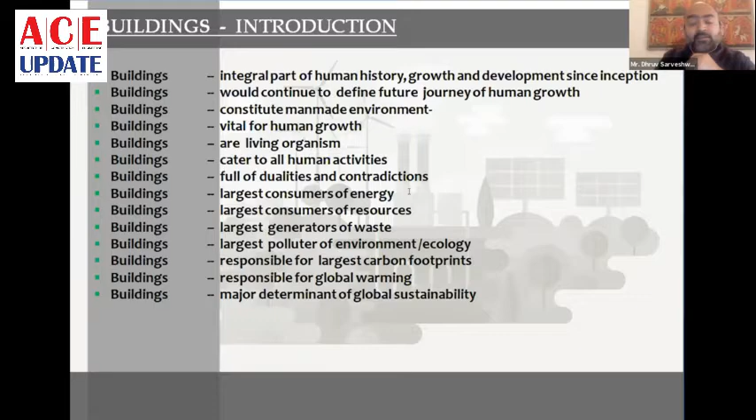But on the downside, buildings in today's time and age are one of the largest consumers of energy. They're the largest consumers of resources and generate more waste than any other activity on earth. A brief introduction to how much resources are consumed by a building: 16% of the world's fresh water withdrawal is taken up by buildings, 25% of the wood harvested, and 70% of global warming is actually attributed to buildings and transportation — meaning the carbon footprint associated with materials that reach your site.

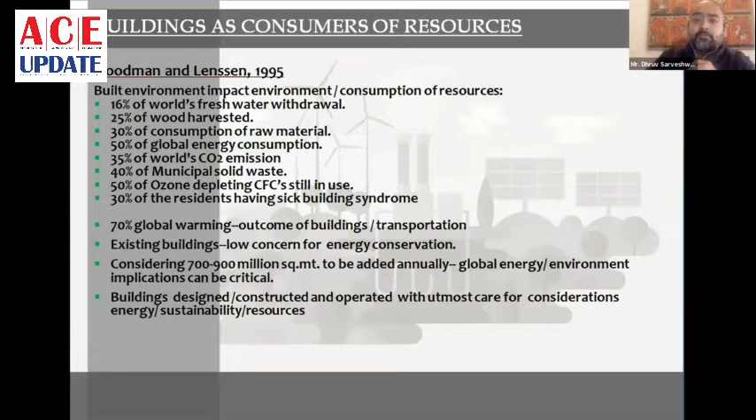As an energy consumption pattern, the developed world has about 22% of the population and about 70% of the energy used. The developing world has 78% of the population and about 30% of the energy used. Now, as the Indian subcontinent, or rather India as a country, we are ushering into a stage where we probably go into the developed nations very, very soon. So the time is critical, and it is now that we understand what we need to do to conserve the energy we are going to consume for future generations to come.

So I'm sharing a few statistics here. Moving on.

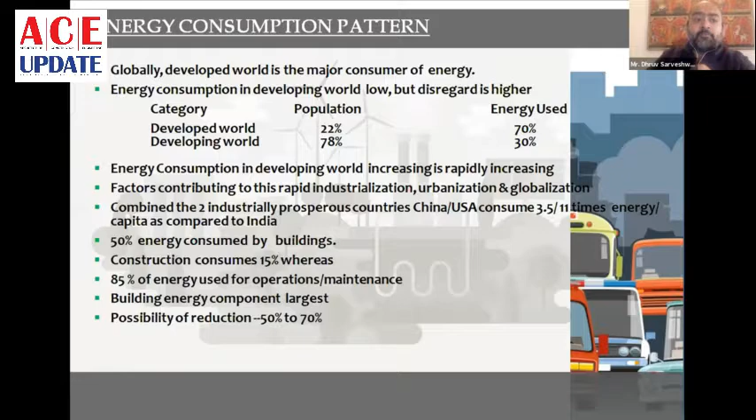Why are we looking towards the benefits of green buildings today? Green buildings have not just become a status symbol, they've become a way of life. If we don't adopt or adapt to this, we would sooner or later falter, and the resources we are meaning to conserve for our future generations will no more be at our disposal. So in designing a green building, the aim would be to conserve energy and water consumption, reduce carbon emissions, reduce waste produced, and consume lesser water.

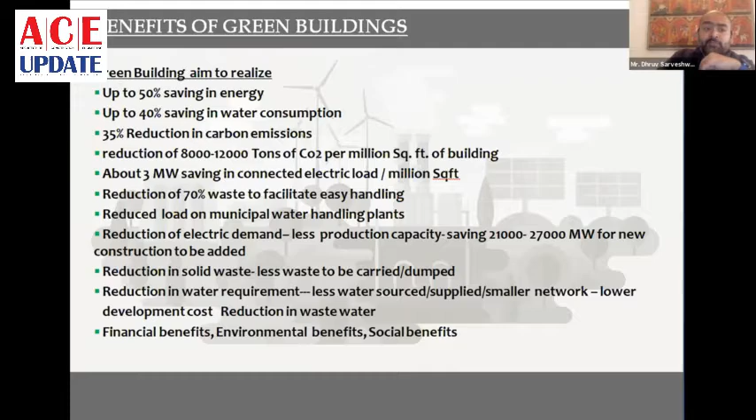I think it is time that we rediscover our time-tested ethos — designing with these five elements in mind: Prithvi, earth; Jal, water; Agni, fire; Vayu, air; and Akash, the sky. So today, in talking about design principles, I'm going to majorly talk about designing with earth and fire, which is site dependent planning, and energy efficiency.

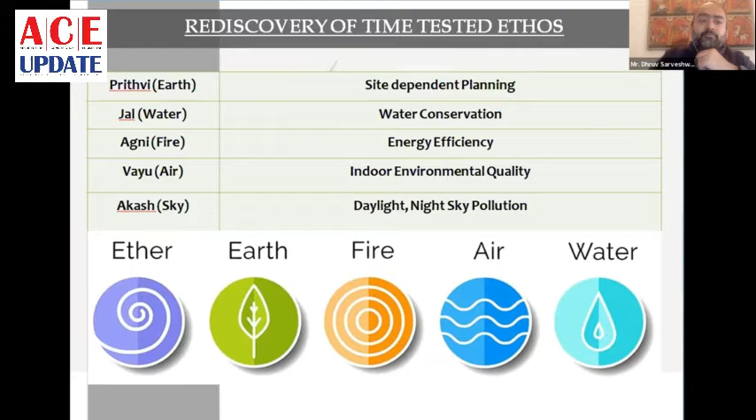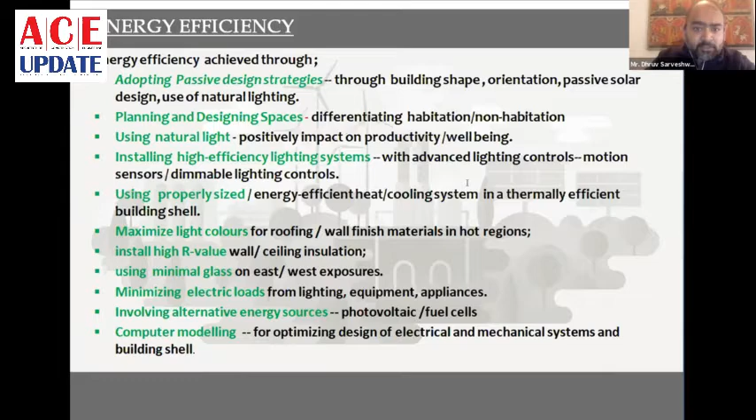Energy efficiency can be achieved through various means, a few of them being adopting passive design strategies through building shape, orientation, passive solar design and use of natural light, planning and designing spaces using natural light, installing high efficiency lighting systems, properly sized rooms, thermal efficient building shells, maximizing light colors that reflect more light and reduce dependency on artificial lighting, installing high R-value ceiling insulation, using minimal glass on east and west exposures, and so on.

The aims we are looking towards when we design energy efficient buildings are conserving natural resources, using less water, optimizing energy efficiency, generating less waste, and providing healthier spaces. Most of us are familiar with the first four things, but the end desired outcome is the fifth: to provide healthier spaces for its occupants.

There is a great big problem that we are facing with the buildings that we are designing, that is sick building syndrome. Probably all of us have been through COVID. We've been confined in our homes for quite a while, and we've realized that there is more to a building than meets the eye, more than just living in these four walls.

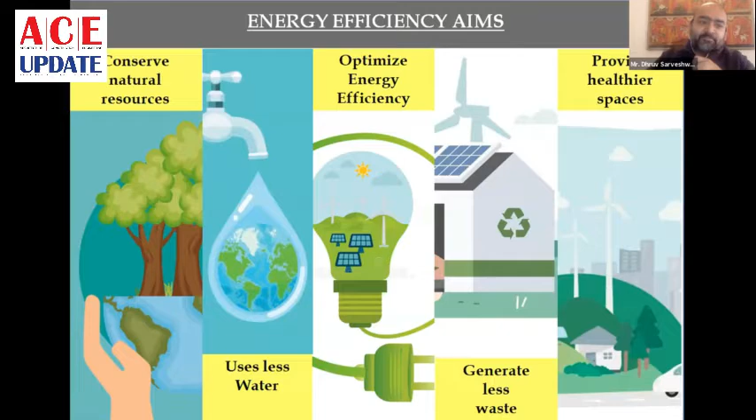Going on, there are cost-effective strategies for energy efficiency. Here I'm sharing with you the energy efficiency strategies that need to be used and the cost implications that there are.

A lot of times people ask us questions, and the client also asks questions like, if I do a green building, what is going to happen? How much money am I going to pump into the entire project? Oh no, no, no, I'm not going to do a green building, I don't have the money for it.

So the intervention is not financial through and through, it is with design interventions. The most common one is a passive measure where you do climate responsive architectural design, an energy efficient envelope, daylight harvesting, and integration of natural resources. The second, a little costlier to implement, is using efficient equipment and efficient building operations like BMS systems. The third is offsetting any demand of the building by using natural renewable energies.

So though this is going to be a cost intensive project, you must remember that whatever cost implication is there, it is going to be offset by the building when it gives you a return in terms of energy savings.

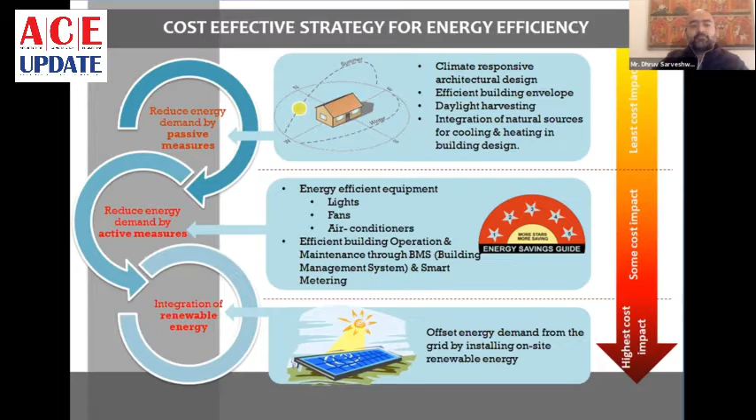So why do we need integrated design principles? Because of considerable energy implications, the need for buildings to be made sustainable, large reduction of energy consumption possible, and sustainable development goals. The end goal is obviously attaining net zero buildings.

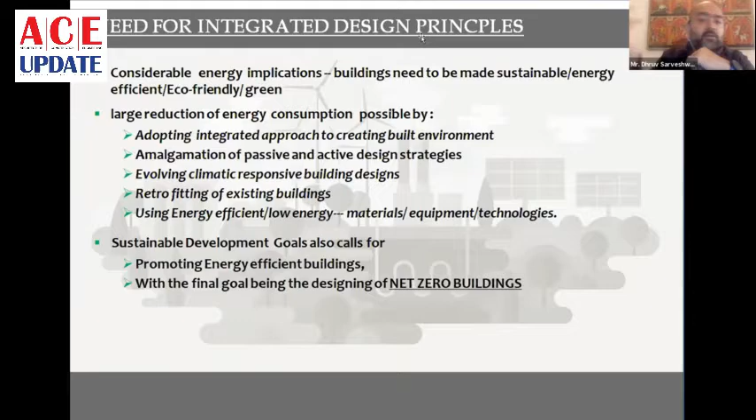Energy efficient buildings with design strategies involve designing the built environment. The aspects of a built environment are basically siting, that is site planning, design, construction, operations, maintenance, renovation, and deconstruction. Consumption, environmental effects, and ultimate effects are going to be touched on by other people in the presentations today.

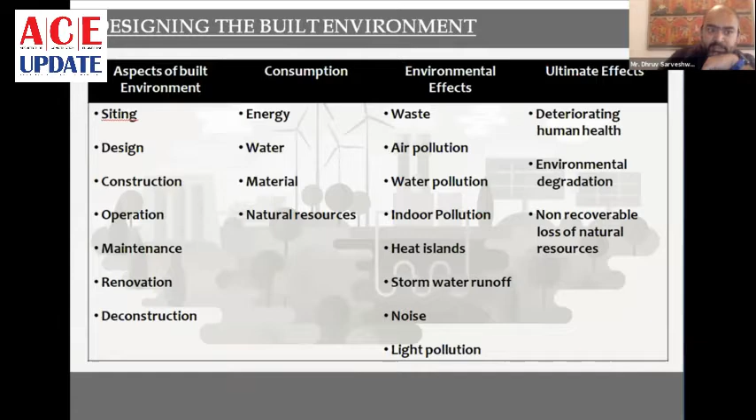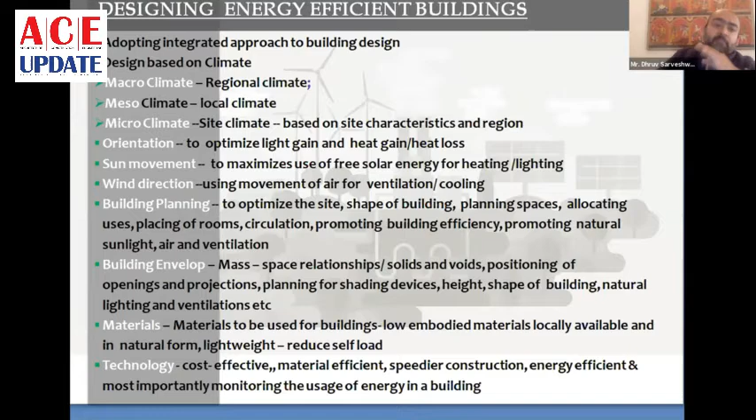Designing energy efficient buildings comes with a tag of designing as per the climate, that is micro, meso, and macro, the orientation, the sun movement, wind direction, building planning, and the building envelope. Materials and technology also play a very important role in maintaining these things and providing a lesser running cost.

Looking at the climate and site orientation, we've got five climate zones in India: hot and dry, warm and humid, moderate or temperate, cold, and composite. All green buildings cannot have the same requirements - this is not a one size fits all thing, it's a tailor-made thing. You have to analyze what place you're working in, what sort of site you have. If you're thinking you will learn a thumb rule for green buildings, that is probably not going to happen.

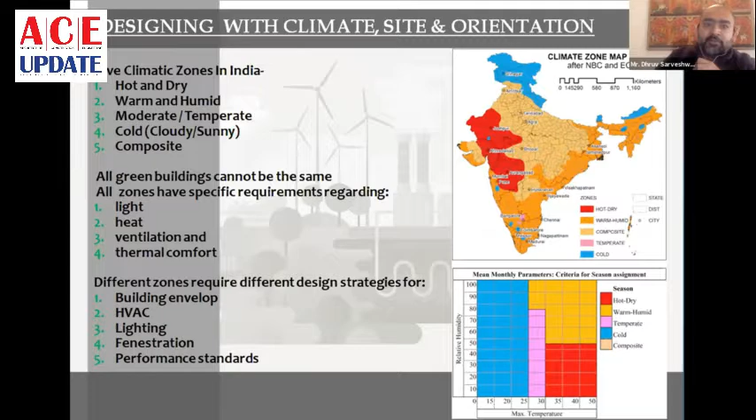Moving on with the hot and dry climate, these are the thermal requirements and physical manifestations. Reducing heat gain is the major drive for a hot and dry climate, and promoting heat loss is also a major drive for designing in a hot and dry climate with passive systems.

As far as passive systems are concerned, when we promote heat loss, there's a lot of introduction of courtyards, wind towers, arrangement of openings, increase in humidity levels, like introduction of trees, water ponds, and evaporative cooling. I'm going to further share a diagram with you of what happens when you design a building in a hot and dry climate.

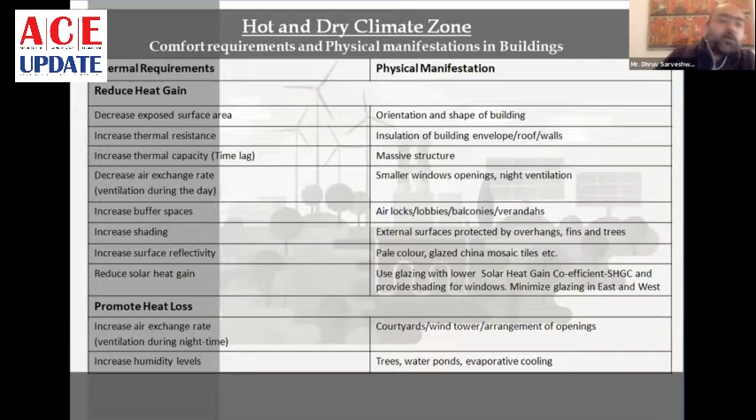In the left diagram, there is a central water body introduced, and a larger opening towards the courtyard which is shaded by the sun, generating cool air, with a smaller opening for exiting the cool air. On the right, there is another building with a lot of cross ventilation, where deciduous trees give shade and cool down the air entering the building. There is always a gap maintained in the images below, creating a pocket of air to retain the coolth of the air generated.

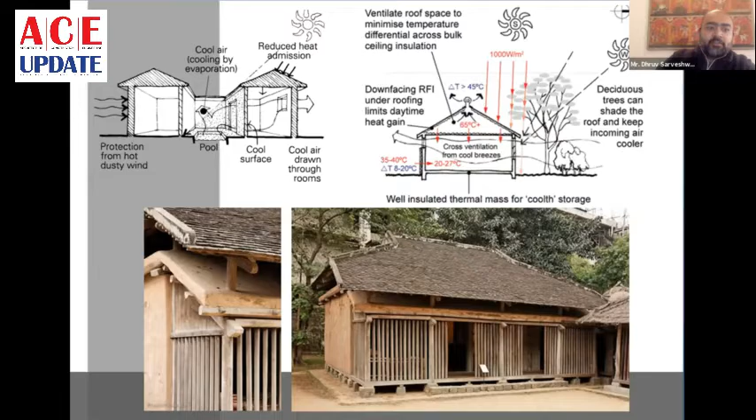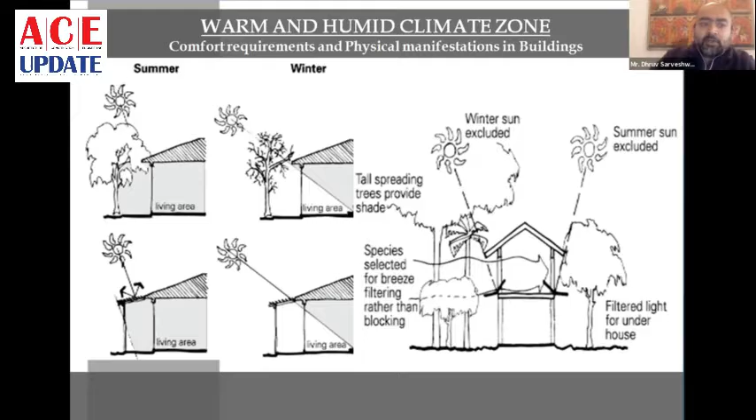Warm and humid climate zone. In summers, you cut out the heat by using trees. In winters, you have trees without leaves which let the air come in. When you have patios or extended portions, you shade them with a lattice. For winter sun, the lattice is designed so that it lets the sun come in. You raise the floor of the building so there is good ventilation underneath, and generally no heat or humidity gets trapped there. An example of a very fine building is the Green Corner House at Costa Rica, by GOSA, a design firm.

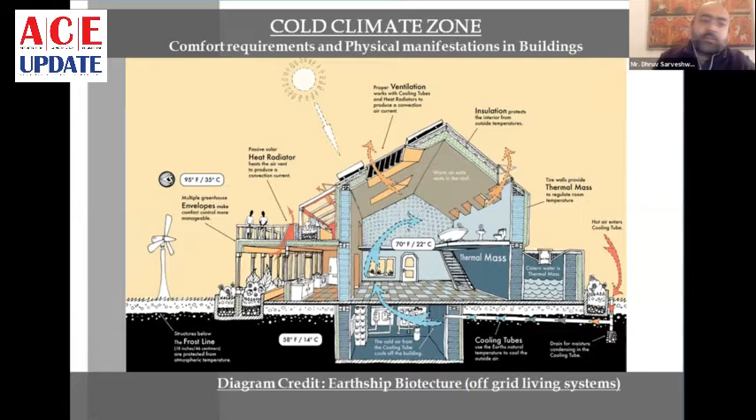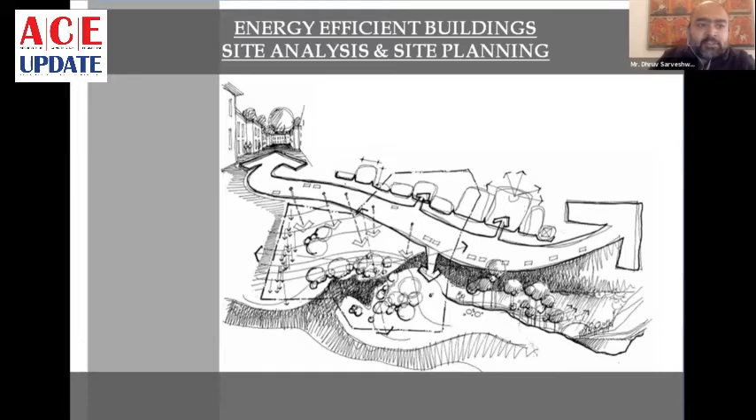Site analysis is a major factor in designing energy efficient buildings. This includes understanding site location, orientation, wind direction, sun analysis, site analysis, neighboring characteristics, site slopes, promoting pedestrianization, and using hierarchy. This is very important: preservation, conservation, and regeneration.

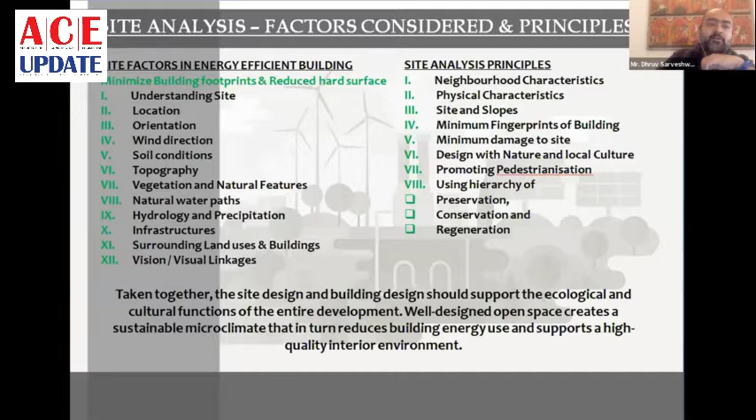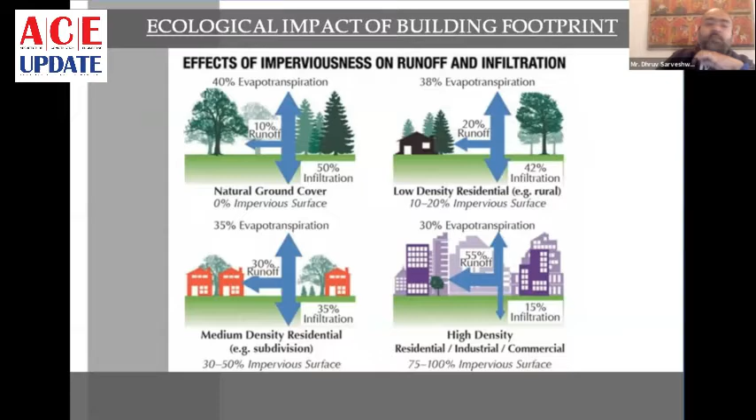This is what happens when you plan a building on a site: the amount of runoff increases. This is why we do site cutting and filling accordingly, so that you retain the natural slopes of the building, and generate good water percolation to recharge the groundwater.

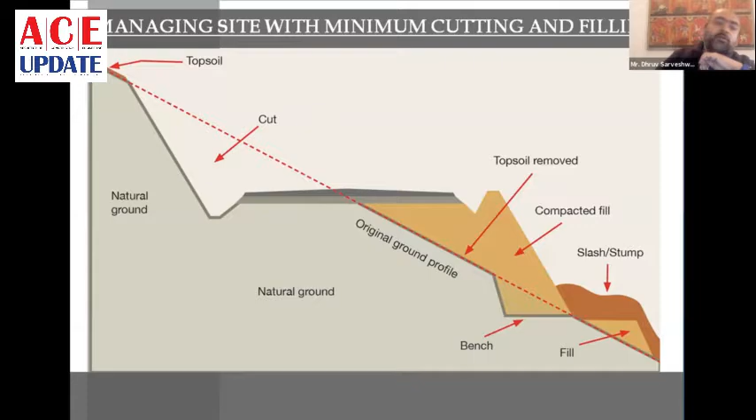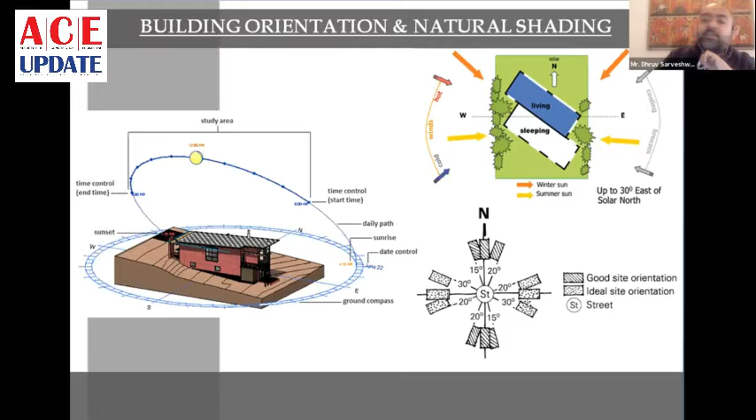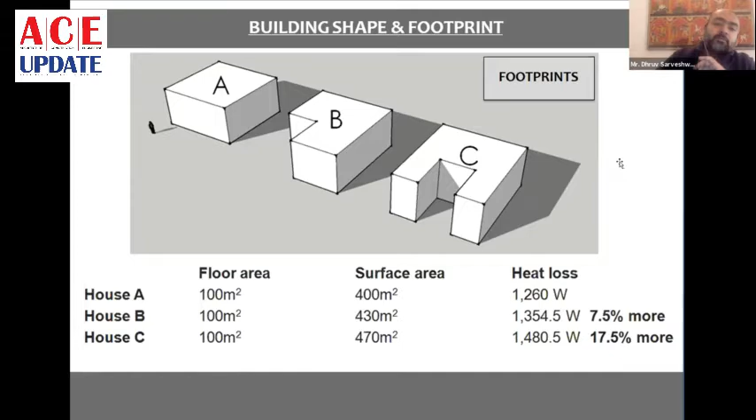Building shape and footprint is a major factor, since the floor areas in all the buildings are similar, but the heat loss is much higher because we've increased the amount of facade exposed to the south and west sun. This is sun and wind orientation analysis, which is what happens when you do a site analysis.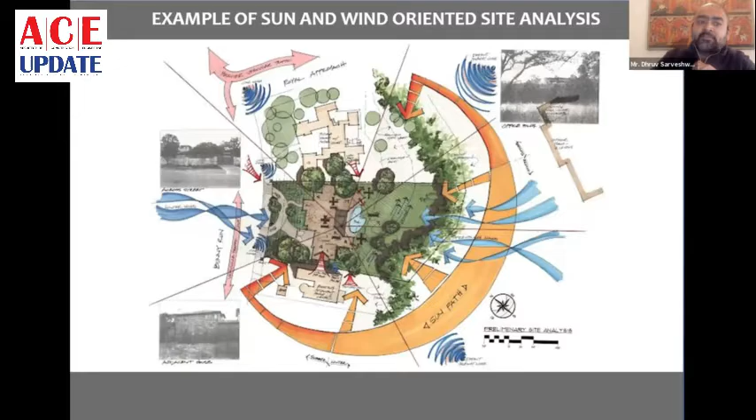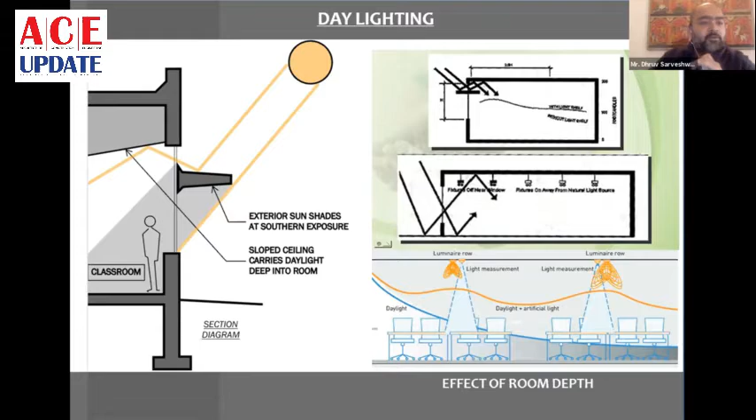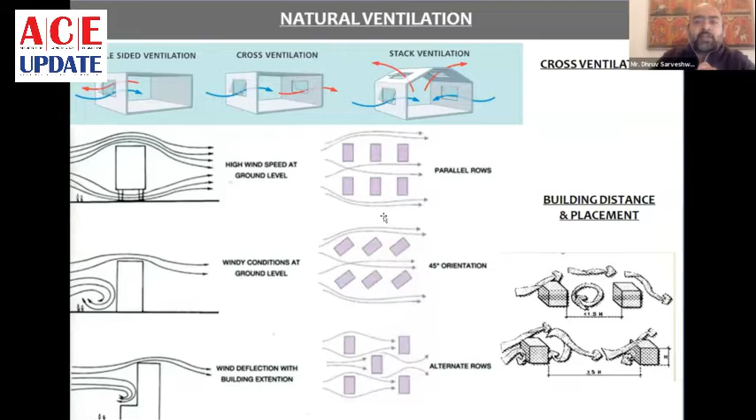This is daylighting. The depth of a room is a major factor in daylighting, along with the shade given, the height of the room, and the size of the opening, which determine how dependent you are on artificial lighting. A new system called daylight harvesting has come up, being used in a lot of basements these days. Natural ventilation depends on how we place buildings and how openings should be placed. Skipping this diagram, this next one is more important for you to look at.

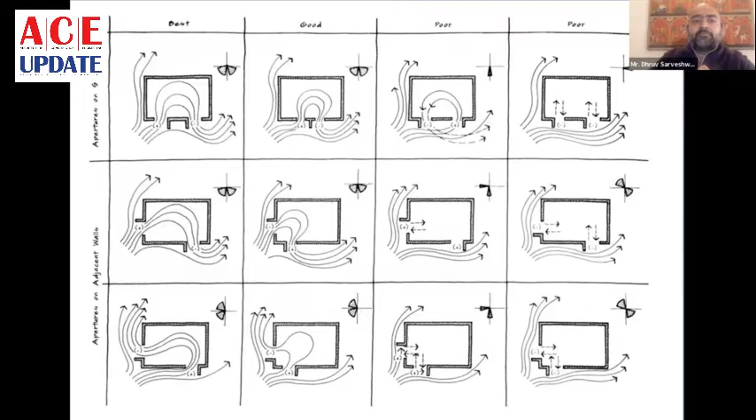Then water efficiency, dual plumbing, rainwater harvesting. We are very familiar with rainwater harvesting and how it works.

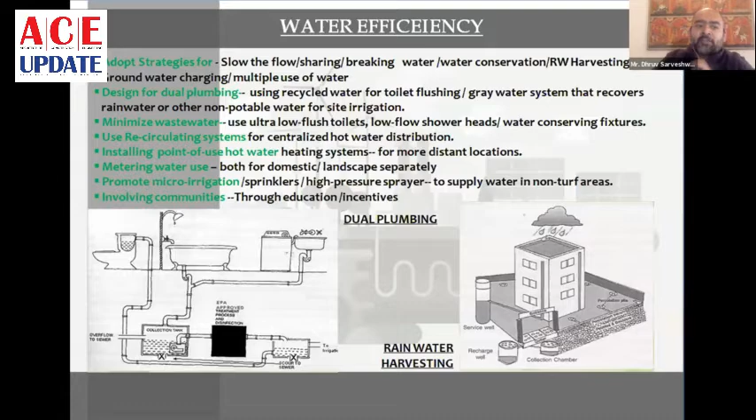Groundwater percolation - a lot of things we are doing as passive energies today are leading up to this: the heat island energy gain or release of a city or building.

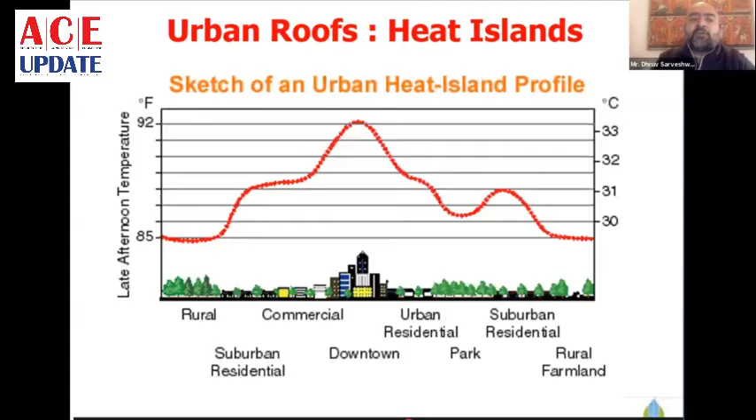After understanding the role of design and planning, it is time for us to dwell on the specific tools and methods we have to address issues impacting energy efficiency.

To speak more about it, today we have with us Akhil Ganatra, founder and managing director of Clancy Global. As principal founder of Clancy Global, Akhil has, over the last 15 years, established the practice as a first generation built environment consultant.

He has spearheaded the organization to achieve service capabilities across an array of verticals within building services and tech enabled construction management across different domains.

These domains include healthcare, mixed use developments, institutional, and residential, among others.

Under his leadership, Clancy Global has completed 300 million square feet over 700 projects in 58 cities across 5 countries, standing among the top 10 practices in India.

Today, Akhil will speak on energy modeling and CFD analysis. So let's welcome Akhil Ganatra.

So we're talking about sustainability. Everything green is not sustainable, and that's why all of us are here. There's a lot more greenwash than there is sustainability in the world, so we're trying to avoid that.

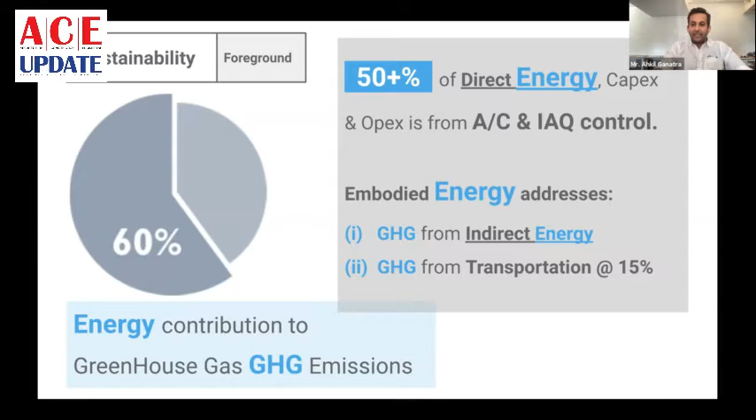So it's a big topic and the most subjective one within the sustainability framework of things. Everything else is a lot more checklist driven. The previous presentation covered a lot about the subjectivity of how shading analysis, sun angles and wind directions can change.

So quickly to answer, does it cost more to be sustainable? First, a responsive design process and engineering expertise is free - just pick the right guys, there's a lot of knowledge out there. Don't greenwash yourself into a project.

Second, for example, renewable energy. Now solar cells or PV have a return on investment of less than 2 years with net metering. So renewable energy was considered the last leg, right?

Everyone said 7 years return on investment, 10 years return on investment, but now that also has become 2 years. So, hey, hello, no reason to ignore it.

And the final one - the industry has grown enough to have sustainable alternatives for anything that you're specifying. If you're not finding one, you're just not looking hard enough, or ask Google, it's so easy.

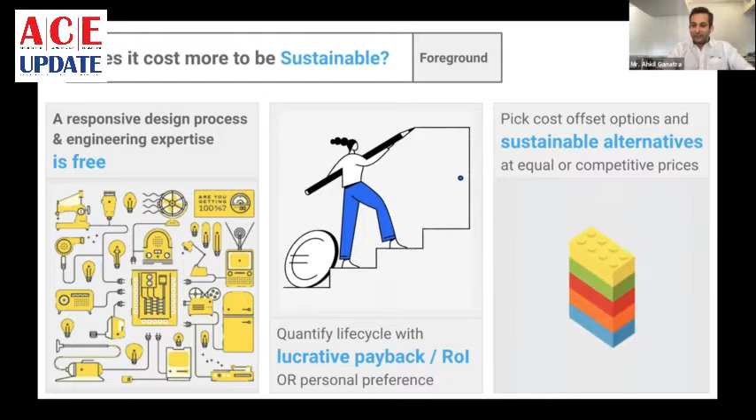Again, setting context - when you're talking about heat gain, 80% of your heat gain is from the building facade. So we've got 3 architects on the panel right now - they love glass, who doesn't?

So just to give you a little analogy while we are on this slide - an insulated wall versus a brick wall, so a brick wall versus an insulated wall.

Now if you compare the most advanced double glazed system to a brick wall, you're getting only 50% of the heat that a brick wall would allow. How much? Just 50%. So glass is actually more efficient than a brick wall.

But now compare that same double glazed unit against an insulated wall - the heat gain is 9 times that of an insulated wall. So glass is a necessary evil.

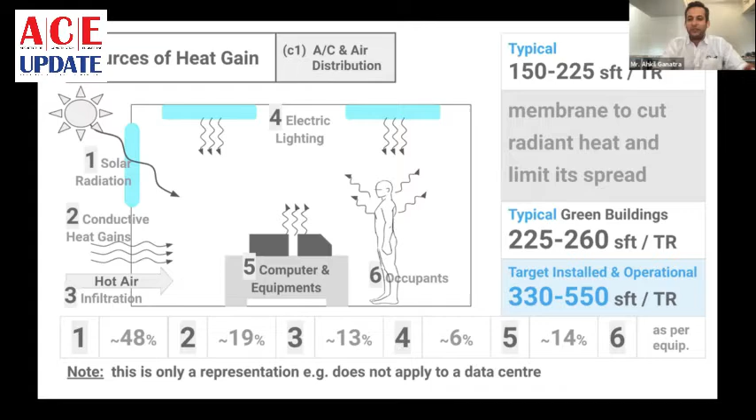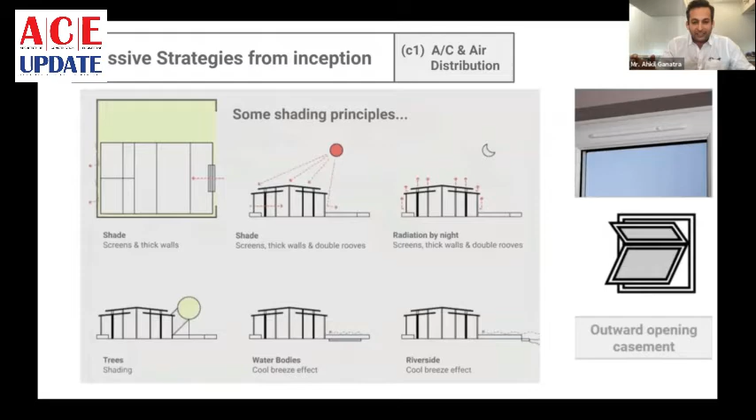These are some passive strategies you can do at a hygiene level, and architects have become a lot more conscious of this. Originally it was supposed to be an engineer's role, which was stupid to begin with, because engineers never influence building forms, shading devices, or what goes on the facade. Architects did. So there are a lot of passive strategies you can make integral while planning the space.

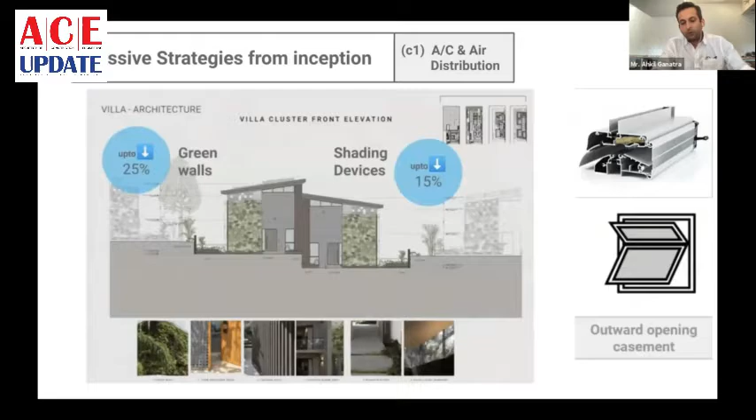But we're not talking about the passive things here, we're talking about energy modeling and CFD analysis. So this is what I tell everyone: energy modeling and CFD is no longer expensive. Every project should do it.

And if any engineer sits across the table with us and says they'll calculate the entire weather file and map it on a psychrometric chart for each hour of the year to tell you how much wind will come and how much energy will be required, it is bullshit. A human can't do it. That's why we've got computers. It's a case of iterating across multiple data points.

So what is energy modeling and CFD? It's effectively telling you that whatever passive strategy you're implementing, to what extent can it work? How much of a percentage difference does it make?

Sorry for being slightly abusive on a webinar, but f**k, because the base case in LEED is so bad that we stopped making buildings that shitty a long time ago. So if you're comparing to the base case and saying you're saving 50% energy, you're actually comparing yourself against a really low threshold. Sustainability has gone way beyond that. Where has the base case gone, and where are you still following LEED's base case?

So energy modeling and CFD is that. What energy modeling does is effectively give you thermal data. What CFD does is give you air-related data. What we call mixed mode ventilation is the new natural ventilation. Natural ventilation works 40% of the time, no matter what tech you're using, no matter how many passive strategies you've installed. Just a small layer of mechanical ventilation makes it a mixed mode ventilation, which means you're still consuming 20 or 25% power of an air conditioning system, but there's a little bit of mechanical ventilation.

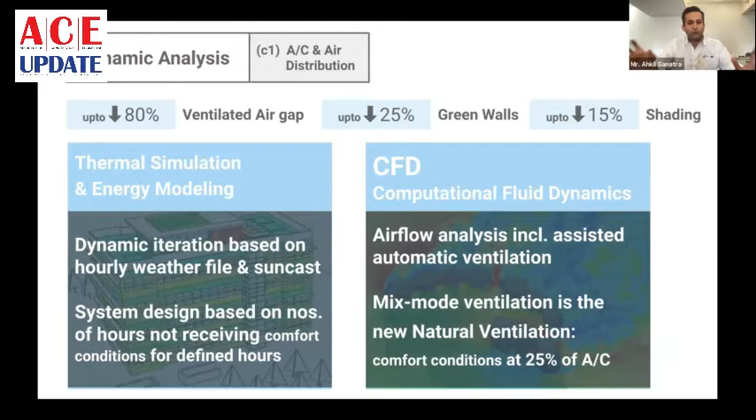So energy modeling and CFD is nothing but proof of the pudding. Anything you're designing, put it through that engine. No human can process as much information. Let it give you an output, and you'll know how much of your strategies are actually working. It won't become my feeling against your feeling, and my brain is bigger than your brain. It's the computer's brain that's bigger than all of our brains, in iterations at least. So I'm not saying they replace humans.

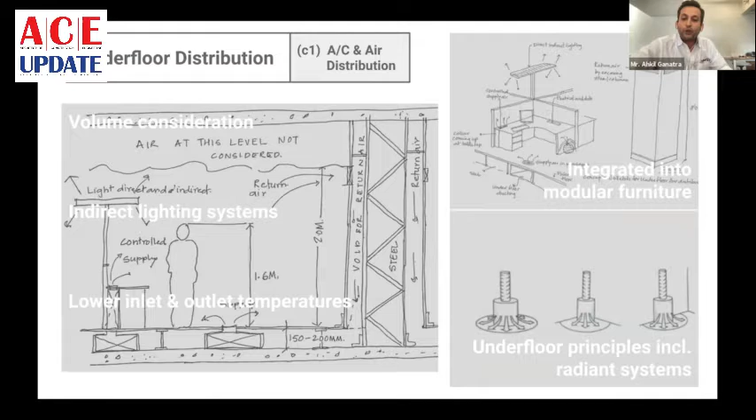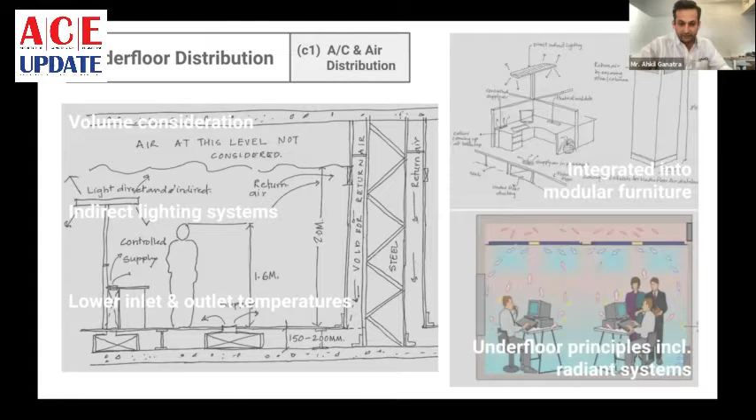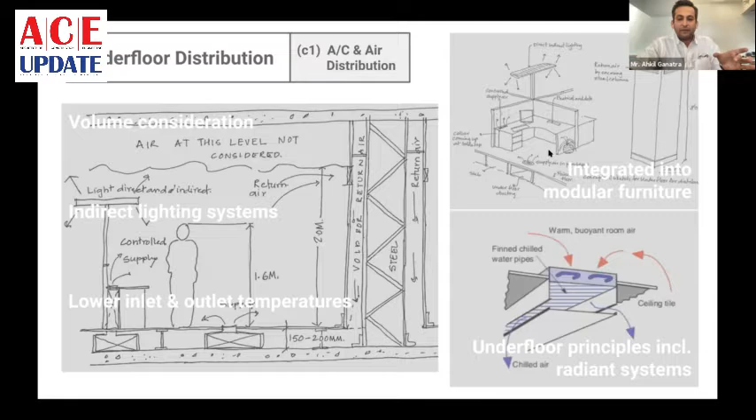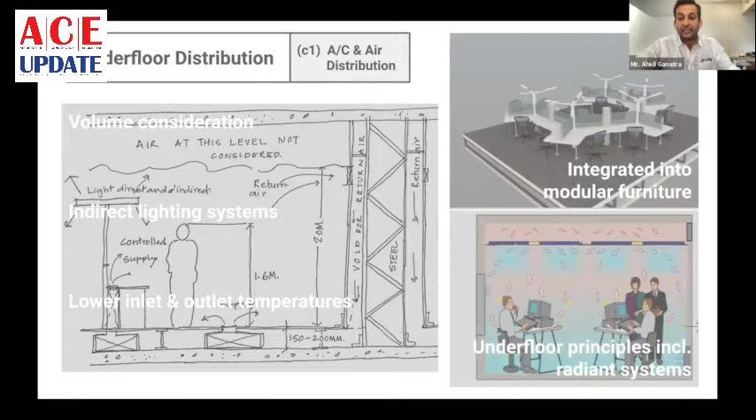Again, underfloor systems should start penetrating, because then you're cooling only the first 6 feet of the space and not anything above it. When you go into a flight, you've got those small nozzles facing you, like jet nozzles you see in buildings as well. It's personal comfort, and every green building rating talks about how controllability is very highly graded. So we're installing quite a few systems integrating the ducts within the modular furniture. We've got a little 150 sleeve from which a flexible duct can run through, so you're not literally emitting air from the floor, but emitting it from the level it needs to be delivered at. You can use a radiant cooling system as a strategy, typically good for bigger projects or projects that run 24 hours or 18 hours, not projects that shut air conditioning 12 hours a day.

I've finished most of energy modeling and CFD analysis. I'll quickly take a minute and a half to take you through other strategies coming into sustainability. Power over Ethernet is the new form of lighting.

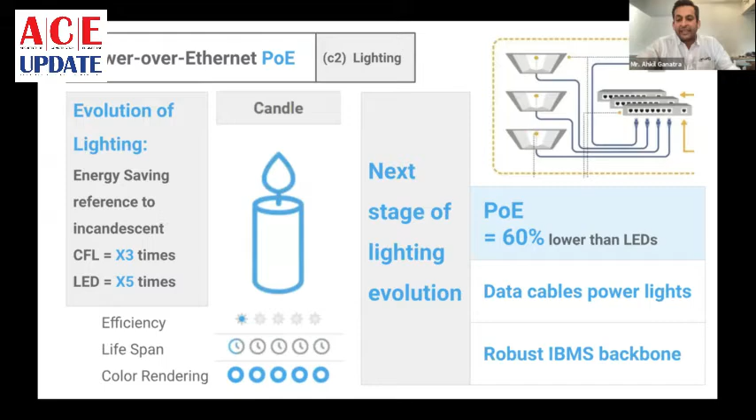In lighting, we've moved from the candle to the LED lamp faster than we've evolved in anything else. So power over Ethernet, watch out—all of you will start seeing it in your houses very quickly. Why is it good? Because it can control intensity and color temperature for better mental well-being. No one has ever understood a psychologist, though mental health has become such a big issue, so just trust the psychologist. It makes a big difference.

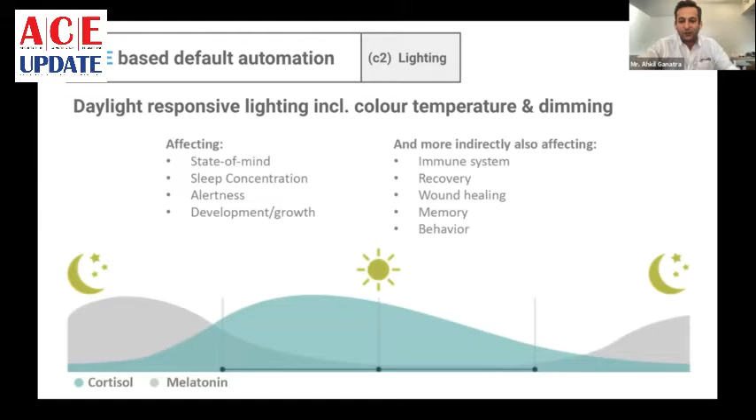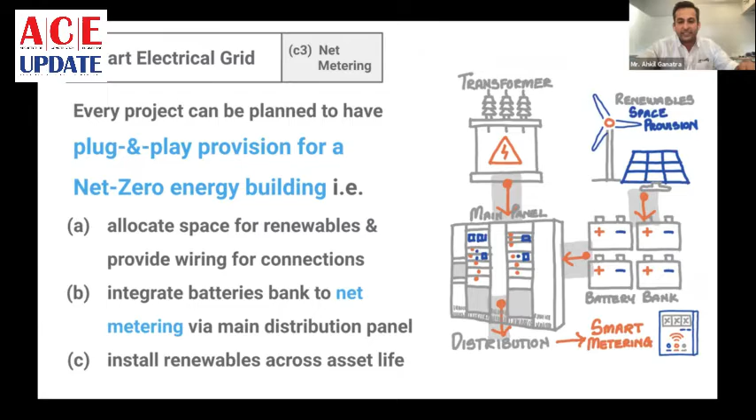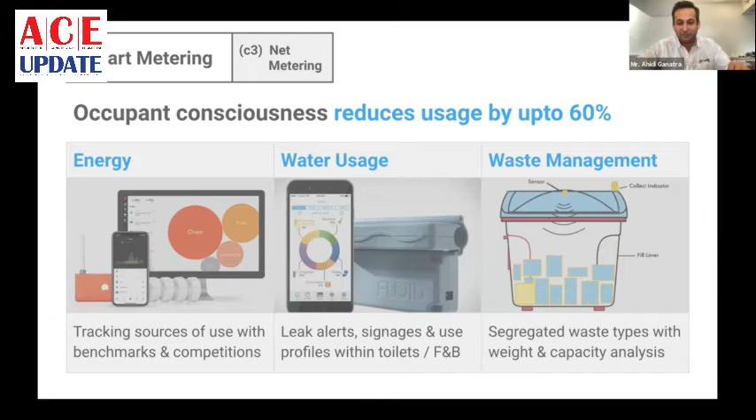This is a very important point: self-consciousness. COVID has brought a lot of sustainability self-consciousness. And funnily enough, if you read global research, most of it says that just by self-consciousness, no physical measure, but people only knowing how much they're consuming, consumption can go down by up to 60%. So while all of us do tsunami-level stories, first go look at how much electricity you're consuming at your house. I've got an energy meter—you install one too, fun times.

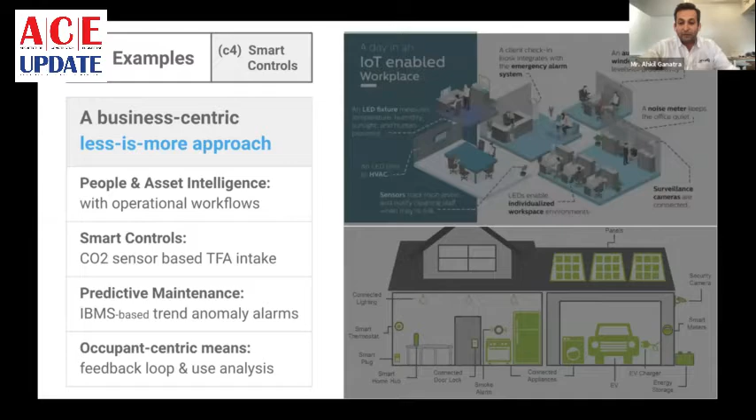IoT's become a load of... stuff again, because when we were in Singapore, we were taught about dashboard diarrhea. Everyone makes dashboards, it's fun to look at, but actionable intelligence is zero. It has to be more action driven, rather than just saying I have a sensor and I know the water temperature - what will you do with that?

Last slide, how sustainability is getting into smart infrastructure. It's not only about operational efficiency, it's about the people that occupy the asset. So a lot of IoT and sustainability is now becoming inward looking rather than outward looking. Earlier it was just build the building and whatever happens, happens. Now it's about getting occupant feedback on whether they liked it, so the next building can be built better. So it's become a case of feedback loop.

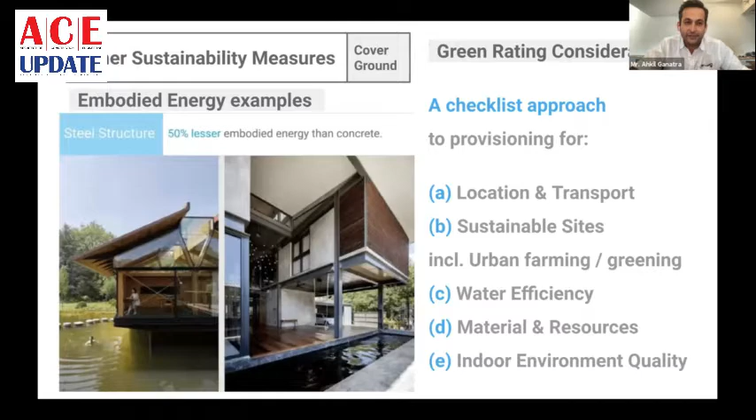Last slide, embodied energy. Other than that, it's more a checklist approach - you have to be conscious of the decisions you're making. Moving on, the raw material and construction techniques in a project also have an important say on the energy efficiency that can be attained in a project.

Now, to speak more about it, we have with us today architect Ritin Gulati. Ritin Gulati, principal architect of Ritin Gulati and Associates, holds expertise in residential and commercial architecture design. After working with numerous Indian architects, and also as an architect and project manager in Dubai, he started his own firm at a young age of 27. Being environmentally conscious, he designs highly sustainable structures, evoking a sense of nature in his designs while prioritizing the needs of the client. So let's welcome Ritin Gulati.

There's a very fine line between the construction that is going on here versus the green construction that we are talking about. I'll give you an example. Developed countries like Singapore and Dubai - undisputedly their construction technology is, say, about 10 years ahead of our technology here, and I'm being very safe, maybe even 20 years. So coming on to the kind of green practices we have in the materials and techniques we use - I have a small time period of about 9 minutes left, so I'll talk about a few pointers here.

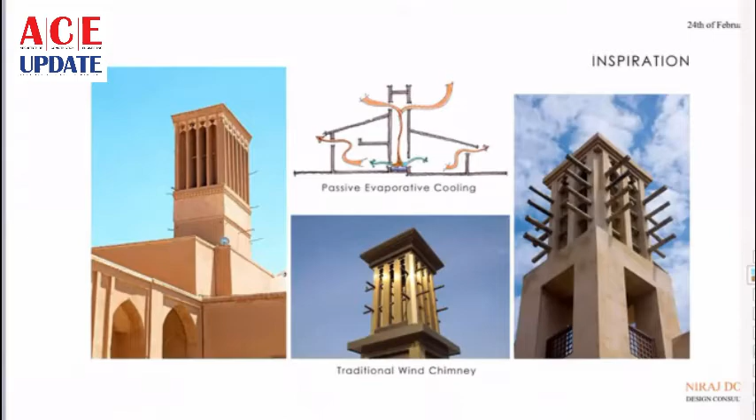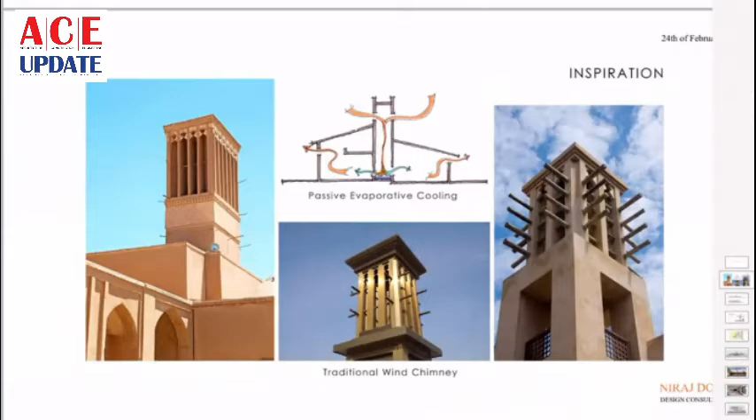This is very simple, I try to make things simple for myself to start with. The inspiration is simple passive evaporative cooling systems. They've been around for the longest time. Everybody has seen these towers: the wind passes through, it cools down because of the way it touches water and cools the environment around, it heats up and escapes the volume. Simple principle, combined with a little difference in the roof system.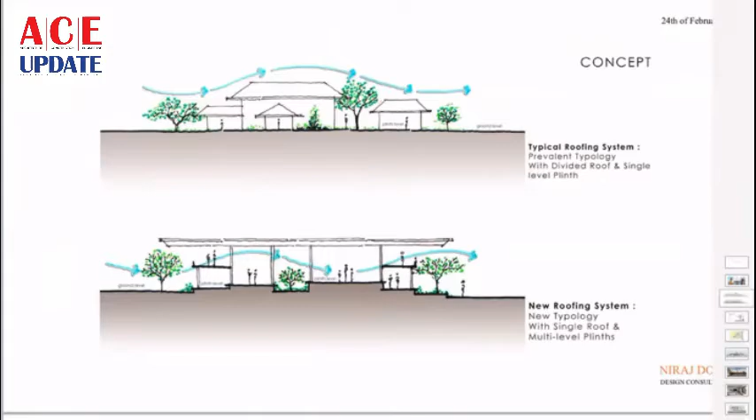So you allow air to pass above the roofs. Maybe we raise the roofs a bit and allow air to pass through our buildings, and also have this fabulous flat surface for lots of solar panels - ka-ching, dollar marks. The same system can be incorporated with these flat roofs, where a simple 1 meter by 1 meter section can take in air, which could be hot or humid. A little spray of recycled water inside those tubes cools down the temperature of the air inside, creating negative pressure, pulling the air in and throwing it out from the bottom area.

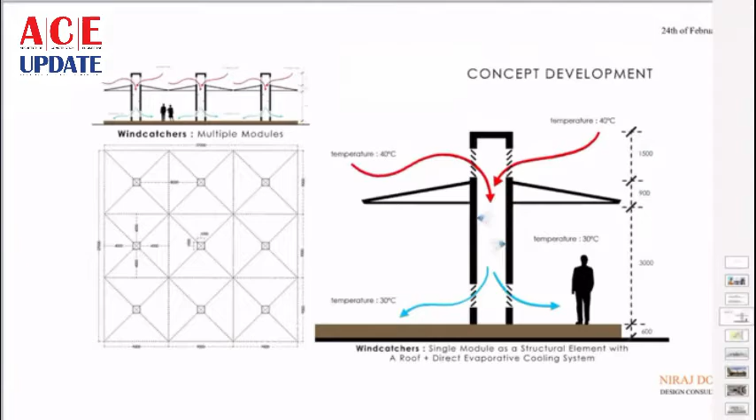As Ankit said, air circulation at the lower level is much more helpful because it will rise up as it heats up. You don't want air coming from the top, it's better from below - that's the principle here. The same simple module is multiplied to create a huge grid, and you can base your whole plan around these. It's a small plan to look at, but you can see they are everywhere - in the living room, dining room, courtyards, puja room, and all the bedrooms.

So they are giving air circulation for all the spaces. It looks simple. It was a little difficult to plan the whole house around this, but somehow we achieved it, and we are happy with it.

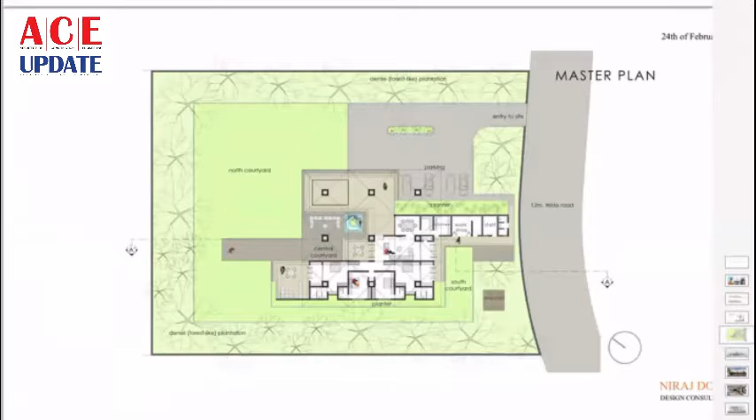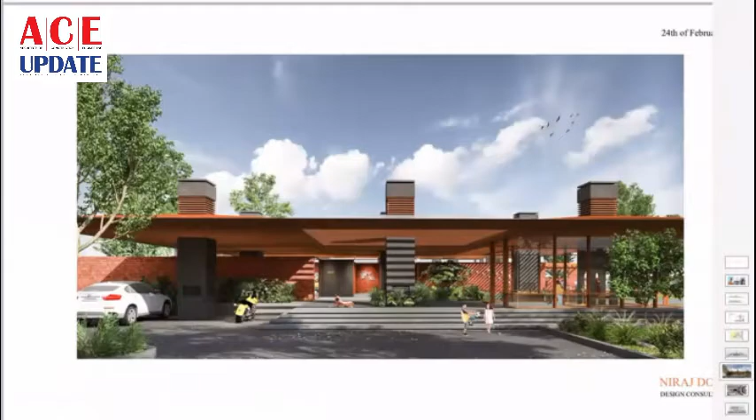In section, you can see clearly where all this air circulation is happening in the house. And believe it or not, we tested this with a single module. It was very rudimentary site testing, but we realized we can drop the temperature almost 6 to 7 degrees Celsius, which is quite huge. And I'm sure if you multiply it and have a little bit of greens around, we can even achieve a 10 degree difference by doing this.

Even if you consider 40 degrees outside, 30 degrees is a way better temperature to play around in the house. And at the same time, it's not bad architecture. It still gives you a nice kind of space. So we are happy with the spaces, the client is quite happy, and yes, we're going on site for this, which is quite exciting.

Next project I'm going to talk about is a mansion. It was kind of a challenge for ourselves - mansions tend to be gas guzzling, so we said no, let's try to make it as sustainable as possible. What can we do? So there is a small video here which I'm going to show.

Can you see the video? Can you hear it? Yes, yes. Thank you. But I can't hear the audio. Can you hear the audio?

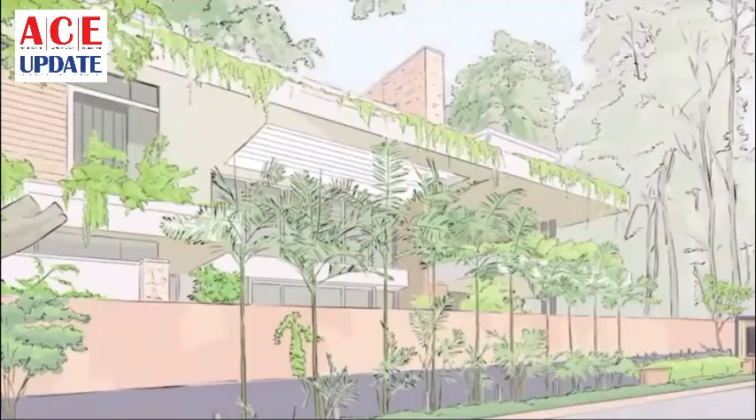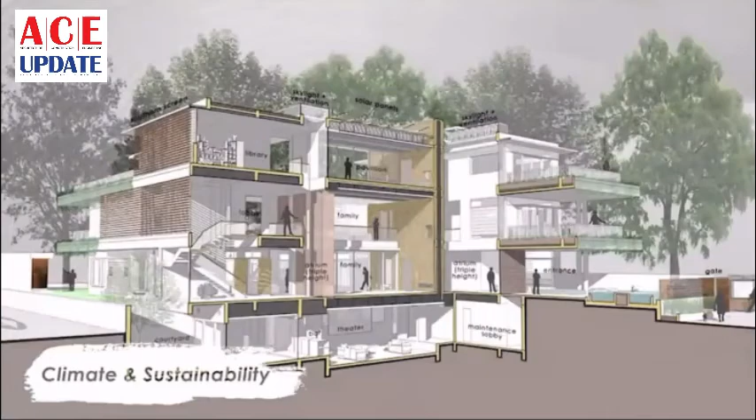Of Pune, India, the Hovering Gardens residence aptly uses natural elements in its creation, such as water bodies, stone walls, landscaped areas on all levels. This helps it merge seamlessly with its environs while making it stand out on account of its architectural beauty. Climate as well as sustainability, often neglected while designing mansions, were driving forces for us during the planning stage. It is based on an H-shaped plan, wherein all spaces have 3 external walls, enabling optimum use of natural light and ample cross ventilation, reducing the need for artificial lighting and mechanical ventilation. An indirect evaporative cooling system has been installed extensively to reduce reliance on conventional air conditioners. Shading devices have been used in the form of huge cantilevered slabs that give a hovering effect while offering grounding to the building. Strategically located triple height atriums accelerate natural ventilation through stack effect, and skylights add to the visual expanse of the space while helping bring down energy bills. Home to a family of 5, this house encompasses the individual character and needs of each family member, blending traditional elements with modern architecture. This can be seen in a calming private veranda attached to the grandmother's room, surrounded by specialized plants and lawns. The daughter's love for reading and nature is conceptualized as a mezzanine corner with a complete glass roof for her to enjoy her book collection while looking at the trees or rain. The son's bedroom, where he entertains friends, is designed with layers of platforms for multiple people to sit and hang out. The master bedroom opens with a memory wall, helping the couple relive beautiful moments each time they enter. At the heart of the house is the family room for everyone to hang out or eat together, with greenery on both sides. For formal get-togethers, a spacious living room has been planned with an attached outdoor party deck. The rest of the house is designed keeping in mind flexibility for space change according to family evolution. With the Hovering Gardens, we seek to set a benchmark in sustainable design as well as a rich spatial experience.

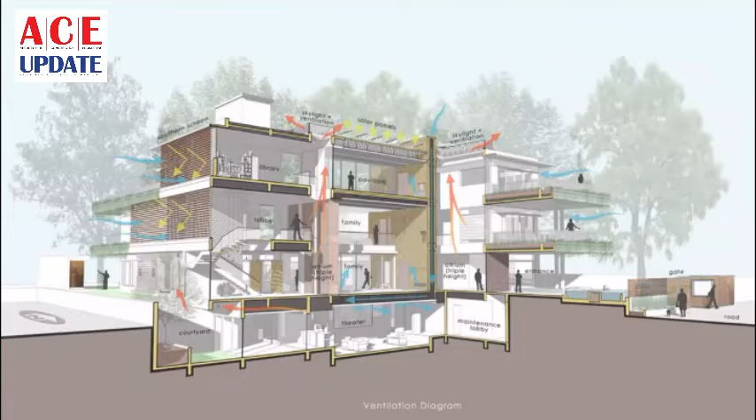Now, attaining energy efficiency in the built environment is not an easy task because it requires a proper symbiosis - of architects, designers, as also energy consultants, not to mention the engineers, and not to mention the guy who's funding the project.

How can I forget that person? The God himself has come down upon us. Yeah.

Then there are bigger challenges like political will and policy changes. So, quite a number of them. So today in our panel discussion, we will try to address some of these.

So let us start, the first question. Let me shoot it to Mr. Ganatra. What can contractors, designers, and architects, even engineers, as democratic elements of architecture and design and construction, do to ensure that future cities are both energy efficient and sustainable?

In terms of what more can be done with regards to sustainability, specifically it's more to do with how sustainability and smart can marry each other. Because somewhere in sustainability, we are forgetting that the people we are saving the world for - their quality of life is also very important, their efficiency is also very important.